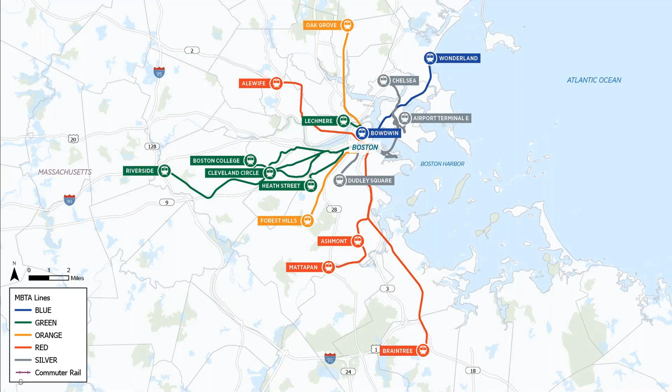So let's put all of that into context. If you are unfamiliar with our locale, Massachusetts is one of the 6 New England states that comprise the northeast corner of the United States. Here is Massachusetts with the capital city of Boston on the Atlantic coast. Next, we will overlay our subway lines, which are known simply by their color to the everyday user in Boston. As we expand the view to include our commuter rail lines, you'll get a sense of the way our services reach out into areas of the state to give our riders a chance to get into, out of, and around the city of Boston.

The Parker Street Bridge is one of several bridge replacement locations that are ongoing in 2021, all of which have some ABC elements involved in their construction activities. The Parker Street Bridge location is highlighted here. It carries the western route of our Haverhill line over a local city street in Lawrence, Massachusetts.

I'm going to turn things over to Mike Ryan, our MBTA project manager, who will get into the details of the Parker Street Bridge project. Mike? Thank you, Carl.

The Parker Street Bridge project is a part of MBTA rail bridge replacement, which is a design-build program consisting of 6 bridges. Part of the contract documents were prescribed track outages for each of the 6 locations and also for Parker Street. There were no incentives or disincentives in the contract. There were liquidated damages if the contractor were to exceed the outage time come Monday morning.

Each design-build team presented different concepts to the MBTA during the procurement phases. The selected team was that of Barletta Heavy Division, which is the construction lead, VHB, the design lead, and for Parker Street, Modjeski and Masters. They were the structural EOR for Parker Street.

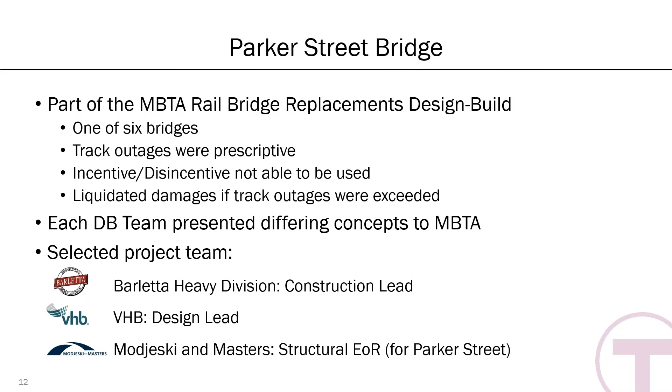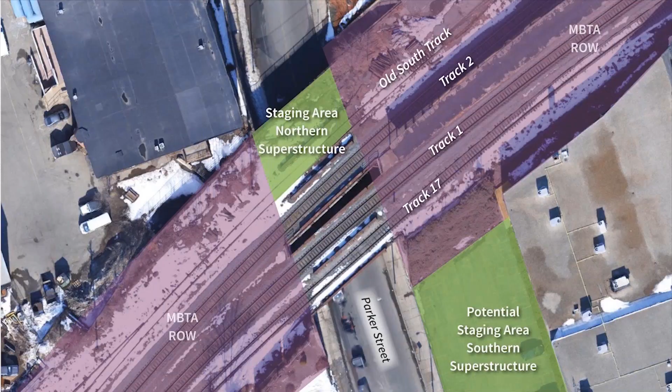So Parker Street, the existing conditions. The bridge was originally built in 1930. There are 5 track structures, 5 bays; 3 of them are currently active. It was a steel girder with ballasted deck and concrete gravity abutments. Parker Street roadway, face-to-face curb, is 40 feet. Sidewalks on both sides, 9 foot on the west, 7'9" on the east. That does include the areas of the piers also.

Utilities always make every site unique. Signal and fiber optics are on the bridge. The MBTA does have the positive train control located overhead, operating and controlling train traffic. For train operations going over Parker Street, 32 commuter rail trains per weekday, 12 on the weekend, and additionally Amtrak runs its Downeaster service over this bridge, and Pan Am is also very heavy in freight on this bridge.

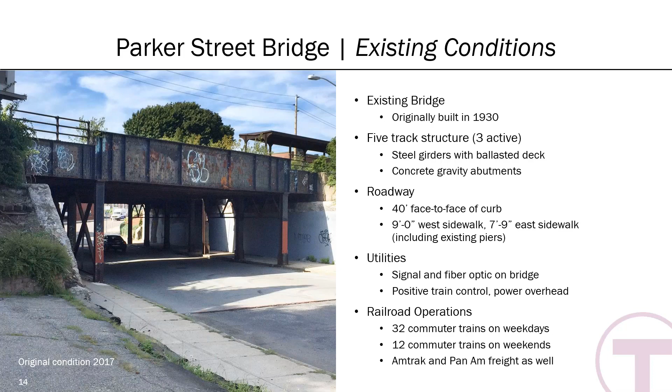The project needs: the existing bridge is in very poor condition. The superstructure steel is rated 4 out of 10. The MBTA uses the NBIS rating system, just for your reference. It's the MBTA's goal to provide safe and efficient transport for all T riders and the public. This bridge is not in a good state of repair, so it needs to be maintained for a good state of repair to ensure that the trains run on time.

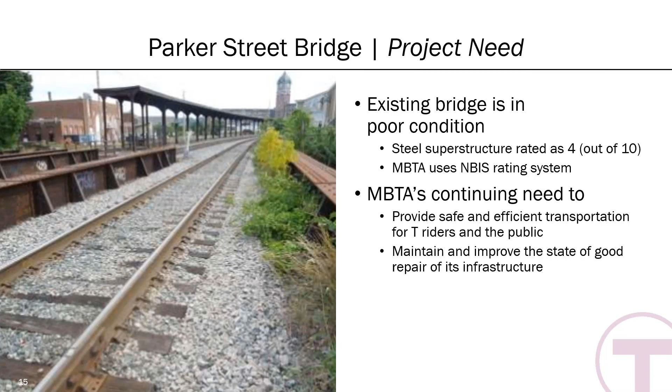Project goals for Parker Street, as stated: restore the state of good repair for this piece of infrastructure, and replace the bridge with something that has a long lifespan; part of the contract requirements was a 75-year expected service life. There was also language to minimize impacts during construction to local abutters, the commuter rail riders themselves, the users of Parker Street, and also freight operations, which run on this line and over this bridge.

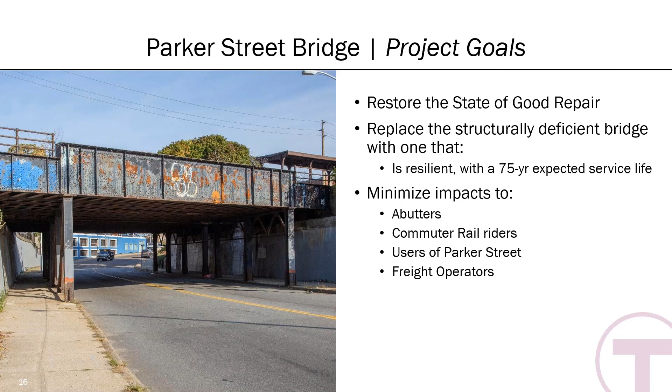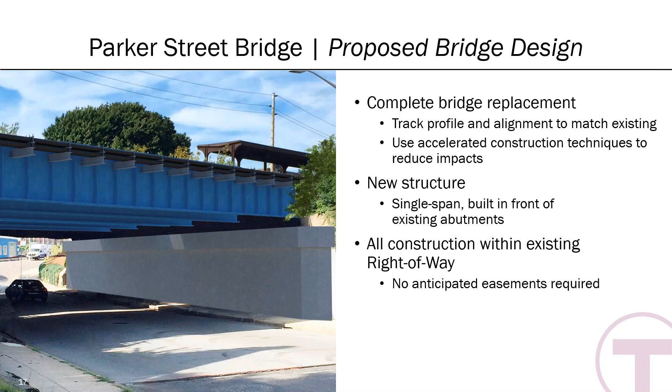The proposed design was a complete bridge replacement. Track profile and alignment were going to match existing; we weren't changing anything there. The design-build team proposed using accelerated construction techniques to reduce the impacts. The new structure is going to be a single span built in front of the existing abutments. And all the construction is going to be within the right-of-way, with no anticipated or required easements.

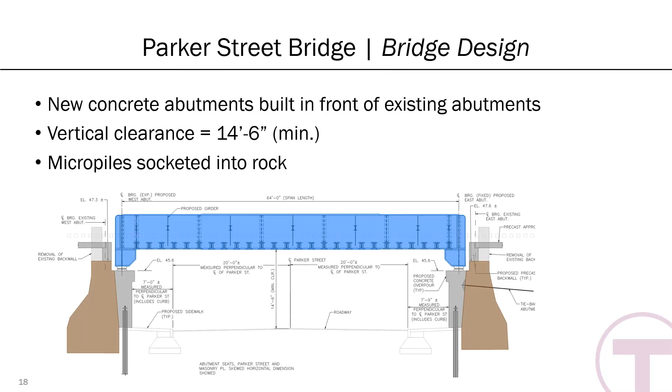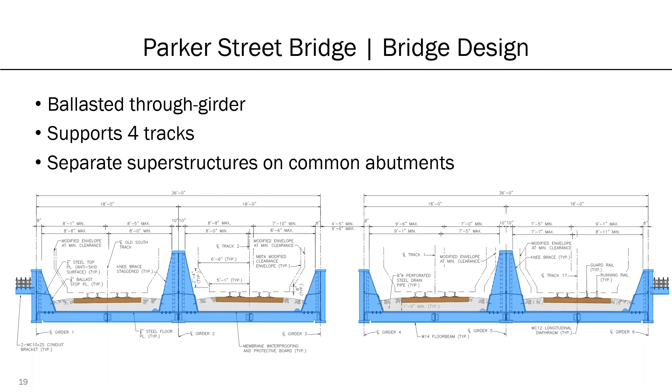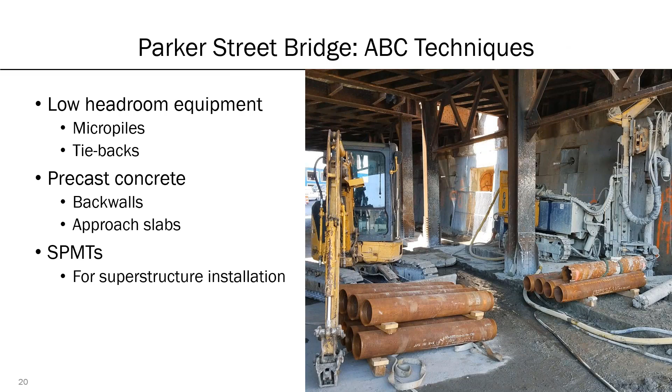With that, I'll turn it over to Bob, who'll go more into the construction. Thank you very much, Mike.

So these next sequence of slides are a series of renderings of a 3D model that we developed of the entire project site. They were developed during the design phase through coordination with the contractor, the designer, and the MBTA. The intent was really to clearly illustrate each phase and subphase of the proposed work, evaluate site space constraints, conflict detection, etc. But they also served as an important visual tool for communicating this project to the public and local stakeholders, essentially showing them when and why certain construction activities needed to happen, and when and for how long any impacts would be implemented to either the commuter rail, freight rail, or the multimodal users of the roadway below.

So just to orient everyone, what's shown on the screen right now is essentially looking northward. Track 17, track 1, and track 2 were all active tracks carrying both commuter rail and freight. The track known as the Old South track was in place but out of service, and then just beyond the Old South track were the remnants of a 5th track, a former spur line that was no longer in place.

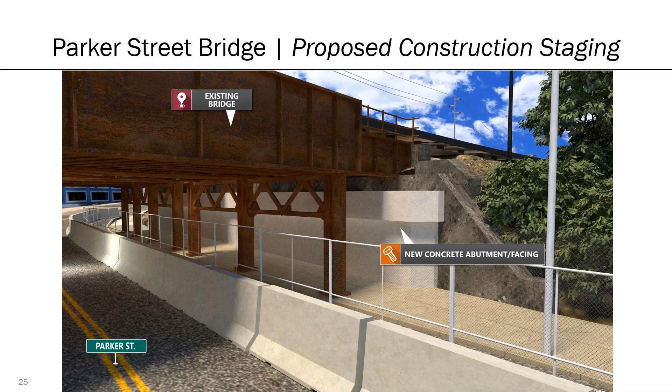The next step, which is only shown here roughly, was a repeat on the western abutment, the same set of construction activities where we built out temporary traffic management, still allowing 2 lanes of vehicular traffic. The eastern sidewalk was open at that point, but the work continued essentially in the same way with the installation of the foundation elements and the construction of the new western abutment facing.

The next stage showed the demolition of part of the existing bridge. As I mentioned before, tracks 17, 1, and 2 were active, but the other 2 existing bays were not. We proposed in this series of renderings to remove those 2 existing bays, thereby creating additional space for us to construct portions of the new superstructure. For these activities where demolition was occurring and the existing superstructure was being removed, we closed down Parker Street for short periods of time, off-peak hours, outside of times where heavy traffic was occurring.

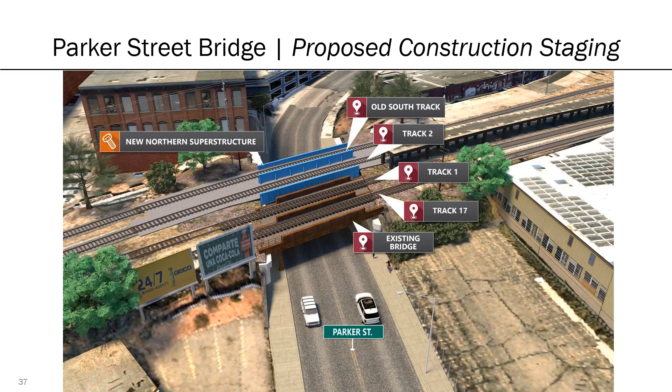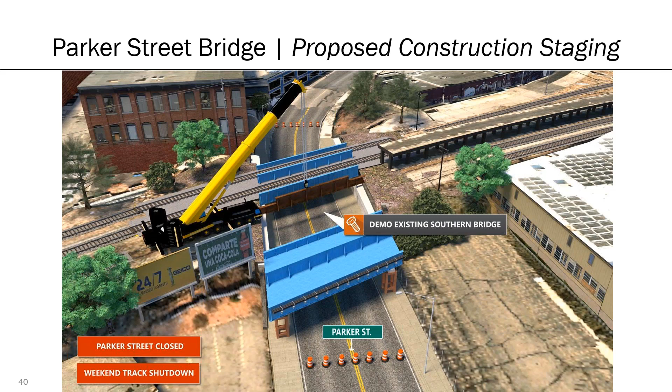So for this southern structure, again, temporary supports, installing and assembling the new proposed superstructure. Once it was fully assembled and in place, during another single weekend shutdown, again, both to commuter rail and freight rail, but also the vehicular traffic below, the existing superstructure was removed. New precast concrete approach slabs were installed. SPMTs were brought into place and moved the new superstructure into its final location. Track and ballast were installed, and the bridges were open for commuter rail and freight rail service.

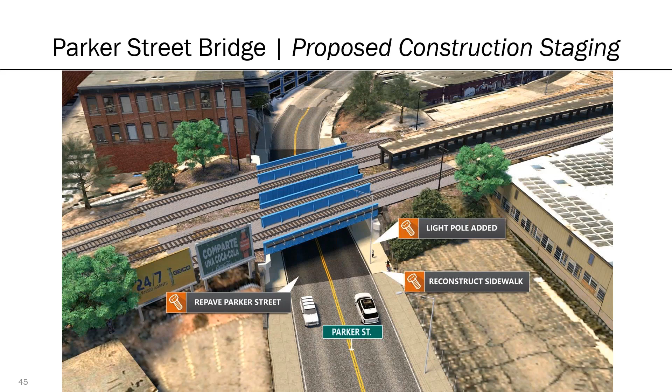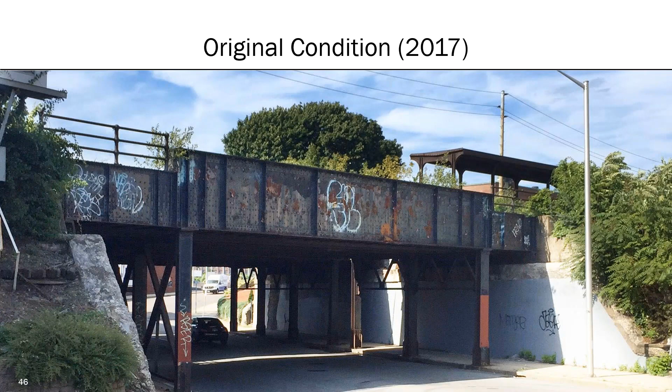At that point, some of the ancillary work, sidewalks, new paving and striping was installed after all of the bridge work was complete. So here's a photo of the existing bridge in original condition circa 2017, and we had a visualization that showed, again, what we proposed the bridge to look like.

At this point, I wanted to mention that all of that sequence that I just described was developed during the design phase, and it's developed in conjunction with the contractor and the engineer and then the MBTA. But as you got through the final end of the design and started the construction, there were some changes that were implemented that affected the order of operations and affected how we actually constructed the project. So how it was actually built doesn't quite match what was shown in those renderings. And at this point, I'm going to turn it over to Andrew Burkholder, who's going to walk through some of those key differences. Thanks, Bob.

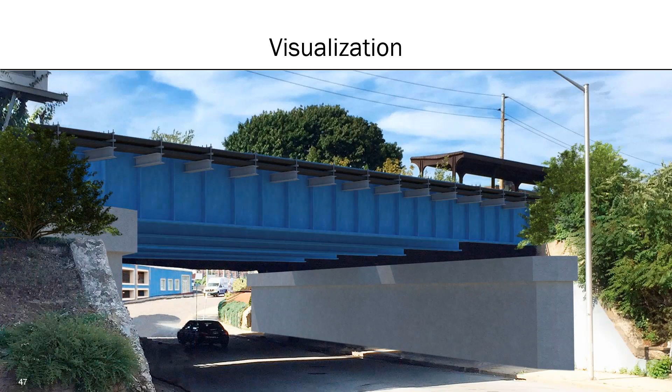Yeah, so this project was a good lesson on being flexible and adapting. Like Bob said, we had this great plan, presented it to the public, just as you saw, and afterwards, the city and the freight operator came to the team and they had some concerns with shutting down this area for 2 weekends, both concern by the freight operator for 2 weekends of disruption, and also the city had a concern with 2 weekends of closing this roadway, which provides a critical link over a river just north of the bridge, which you may have seen in that map that zoomed in.

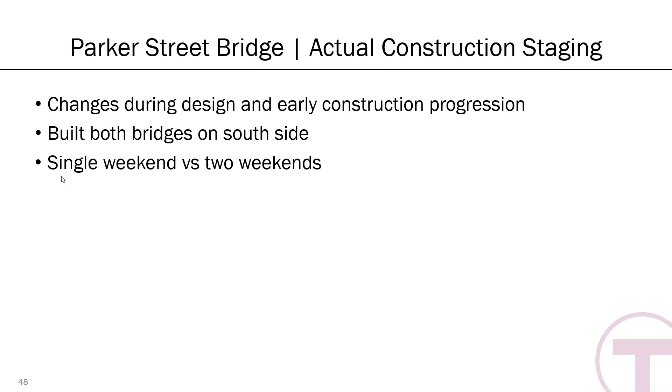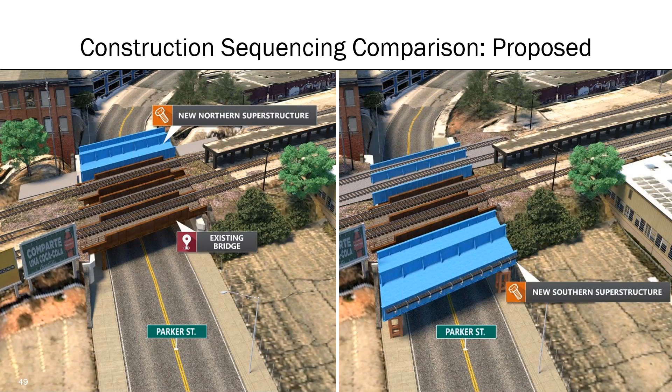So at that point, we were already in design, already working out the details, but the design build team, MBTA, the city, we collaborated on a solution that allowed us to use only 1 weekend to complete this work. So again, a reminder of the proposed sequence here, and then let's get into what actually happened. So this picture on the screen shows kind of mid-weekend closure, but a few things to point out. The superstructures are shown here at the bottom of the picture. These were assembled to the south of the existing bridge, so both superstructures assembled to the south rather than one on each side.

These were assembled on temporary shoring over Parker Street. So again, minimizing impacts to the users of Parker Street. A few closures here and there to do the overhead work, but for the majority of the time, Parker Street was open while these structures were assembled overhead on temporary shoring. Basically assembled over a 3-month time frame in preparation for the weekend outage.

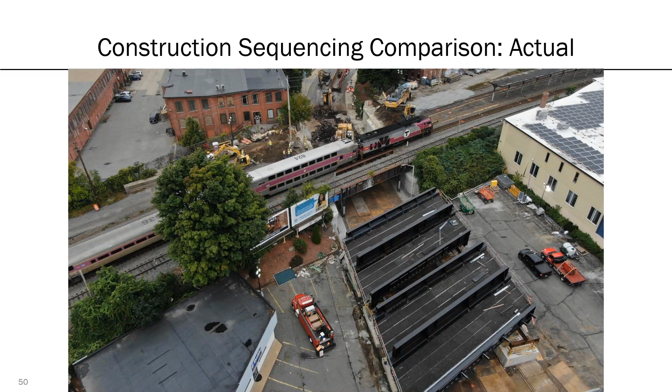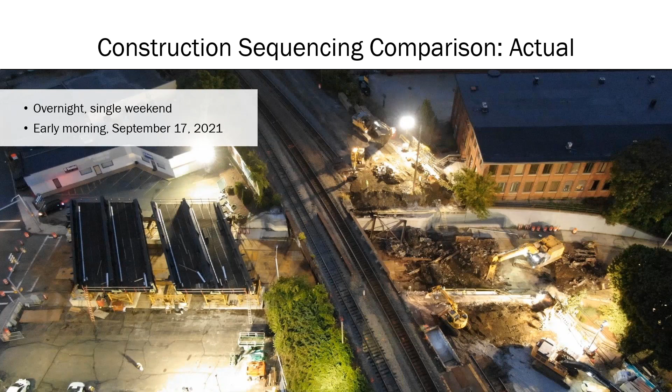So this is the beginning of the weekend outage in the early morning, September 17th. This is looking to the west. You can see the northern portions of the existing bridge are being demolished. And again, the new superstructures sitting over Parker Street are ready to go. So if we head to Friday, at this point, still doing some cleanup from the demolition. You can see the MBTA train still crossing the existing bridge. That track was still active.

Also, just after this picture was taken, the installation of the precast back walls and the precast approach slabs was beginning. So that involved drilling into the existing abutments, setting the precast, installing dowels, grouting that all together in preparation for the superstructure installation.

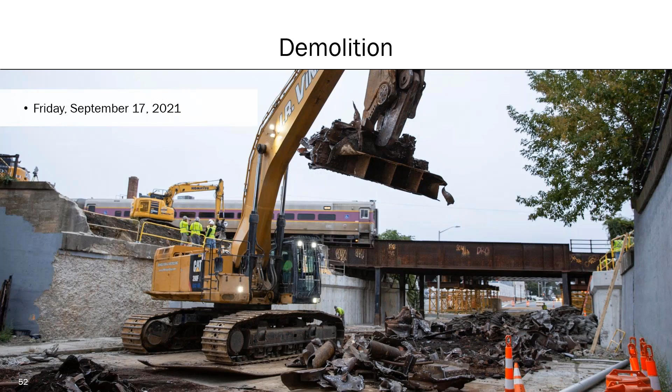So at this site, SPMTs were chosen for a number of reasons. And one of the biggest ones was the feature that's crossed. Here we have a roadway, a nice area for these SPMTs to move and operate, as opposed to a river crossing where it just wouldn't be usable.

It also provided flexibility. So there's a lot of consideration early on in the project that maybe these superstructures needed to be assembled off-site in a parking lot somewhere and driven in. Ultimately, obviously, the contractor chose to assemble these over Parker Street. But having those SPMTs, assuming that that was the way we're going to go from the beginning, offered us that flexibility.

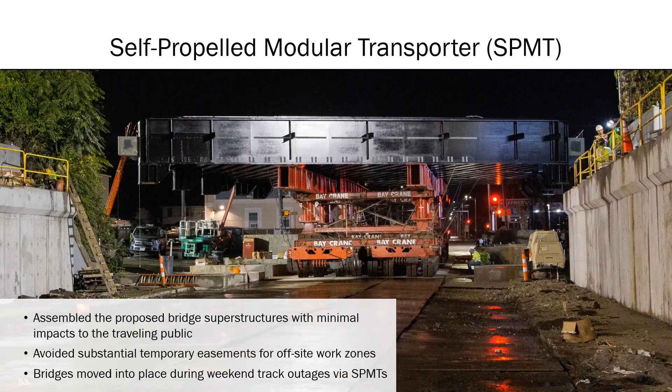All right, so I think this is a short video. It's not going to show the whole thing, but at least gives you an idea of how one of these superstructures was moved into place. So each superstructure had its own SPMT unit underneath. Both were ready to go at the same time. They moved individually, but we didn't have to drop one bridge and move the SPMT back to grab the second superstructure. They were both ready to go.

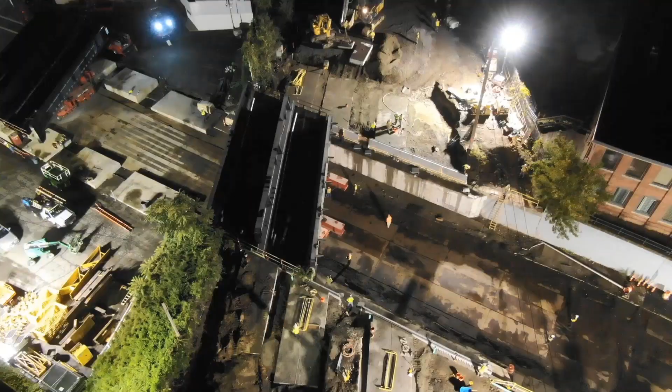This is an overhead view of that northern superstructure moving into place. All right, and then this is the final condition. So this was taken not too long after the weekend. You can see there's still some ancillary work that needs to happen, some roadway work, installation of sidewalks, finishing up. But the bottom line is that the roll-in, the replacement was successful.

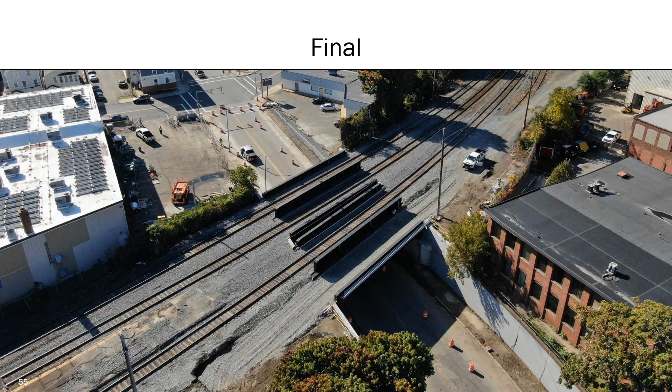We met the deadline. Tracks were opened Monday morning for commuter rail service, freight service. Everything mostly went as planned. But the important part was the deadline was met. Train service was running when it was supposed to be.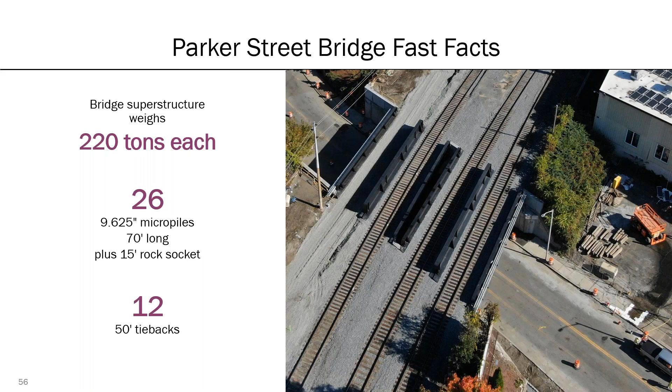There was also a fairly large force main sewer just behind the eastern abutment. And so again, a lot of times on these projects, we've constructed abutments behind the existing, but in this case, that really wasn't practical for those utility reasons and added a lot of risk and potential delay to the project.

Another key takeaway is the close coordination needed with these municipalities or cities, towns where the projects are. It was our close working with them that we were able to pull this off in one weekend. We worked with them about detours, about lighting, about public outreach. That was a very important part of this project, not only for residents of the city, but also users of the T.